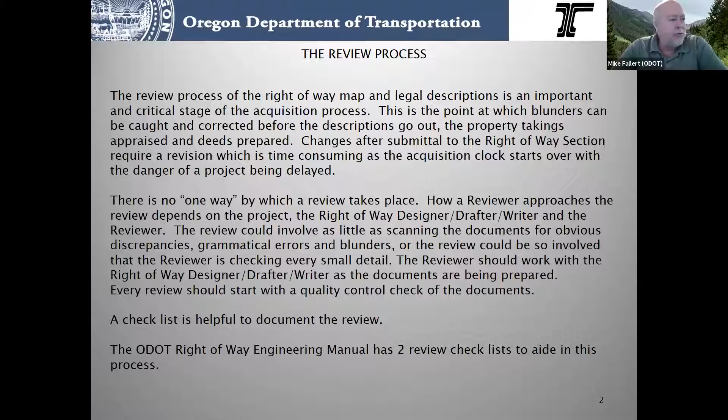Within ODOT, in our right-of-way manual, in the appendix, there's two checklists that we have provided that they've created and put together over the years - I think the original looks like 2012. There's a light review for maps. We've got some others that I think we've been working on for internal ODOT with some different stuff, but it basically has the same stuff from that the survey group is working on. I don't know if we're going to get them incorporated into the manual yet, or when that's coming. It may be soon.

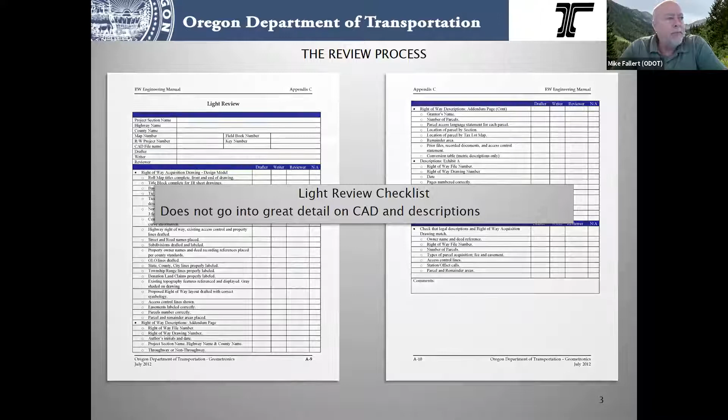So you can do the light review checklist. It goes through a lot of the things - you don't have to get super detailed, but it is best if you, maybe the first one or two, especially if you're new at writing descriptions or your group is new at it, this is a great roadmap of things to check.

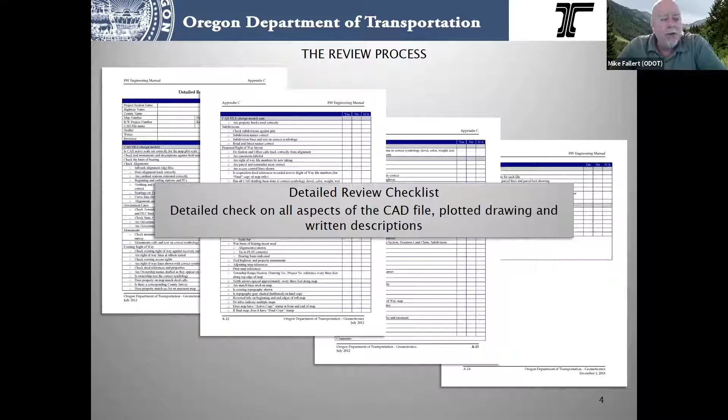You can get into the very detailed, which is going over the CAD and plotting and writing and everything all combined. So much more detailed, a lot more checklists, but it's tried and true - it's through years of doing this basically. So this information was passed down and combined over the years.

So like we've talked about, the primary purpose of the right-of-way drawing is to provide a visual guide, and it assists in the property acquisition on our projects. And it has drafting standards that have been set up and clearly defined for years to make the information as clear and concise as possible. It's imperative that you try to adhere to the standards because that keeps that consistency that we were talking about.

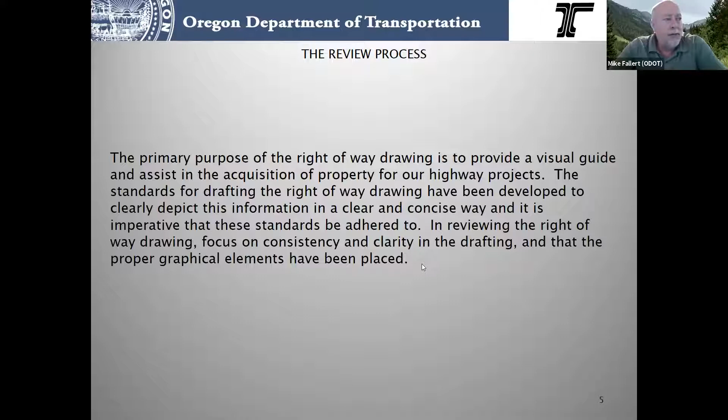So in reviewing the right-of-way drawings, focus on the consistency, the clarity of the drafting, and graphical elements that have been placed.

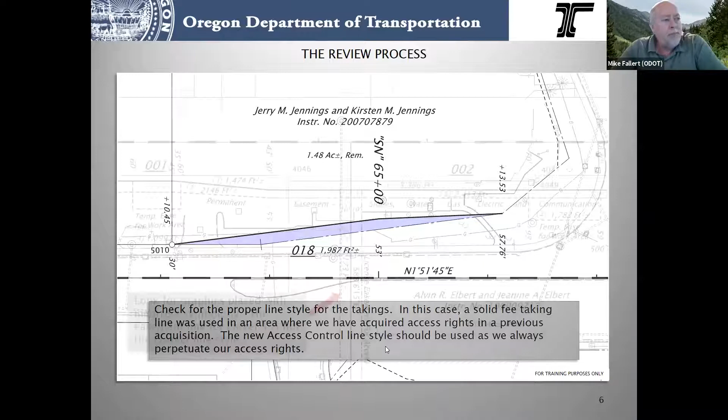In this scenario, look for graphics placed with incorrect symbology. The easement line here for parcel 3 is not the correct line style.

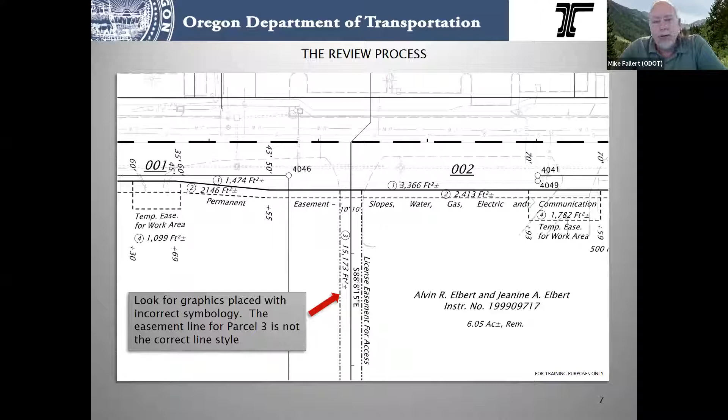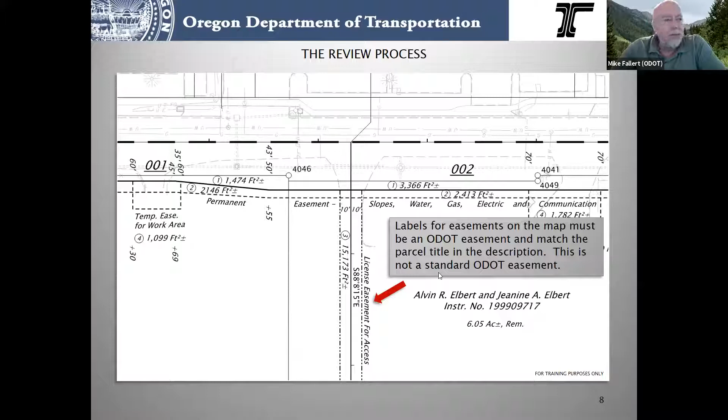Look for labels of the easements. They must be part of the ODOT approved easement list and match the parcel title and description. This title here is not an ODOT standard easement. If you were showing an existing easement, you would say 'existing' if that was the title, but not for a new easement.

Here, government section lines don't stop at the highway, they continue through. So these are just some minor scenarios and things to look at.

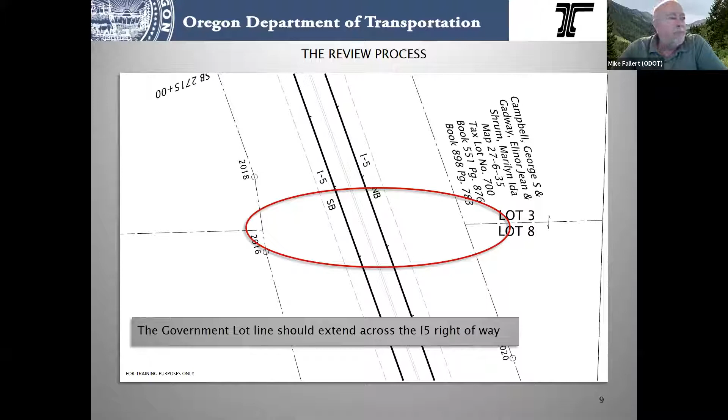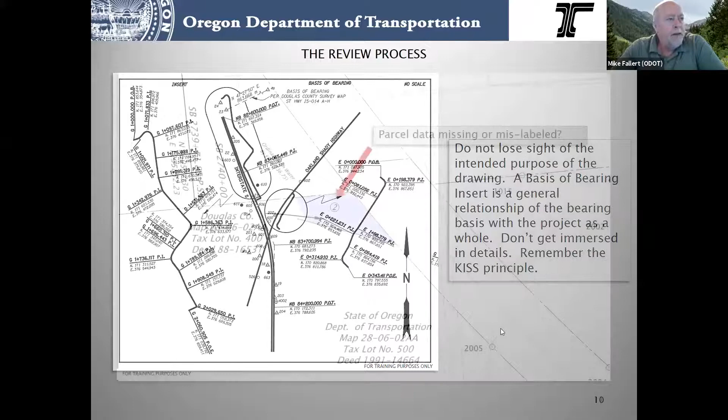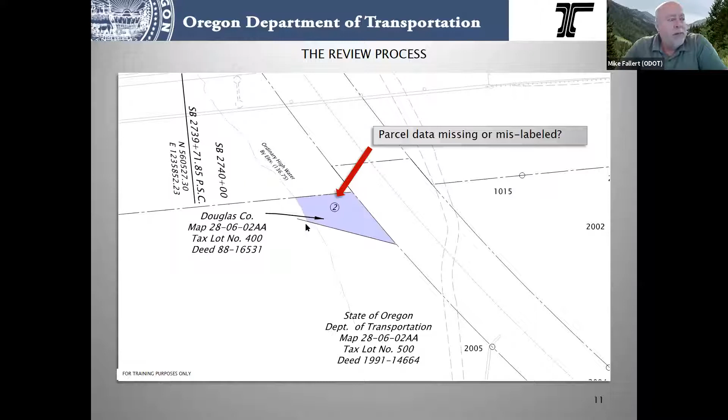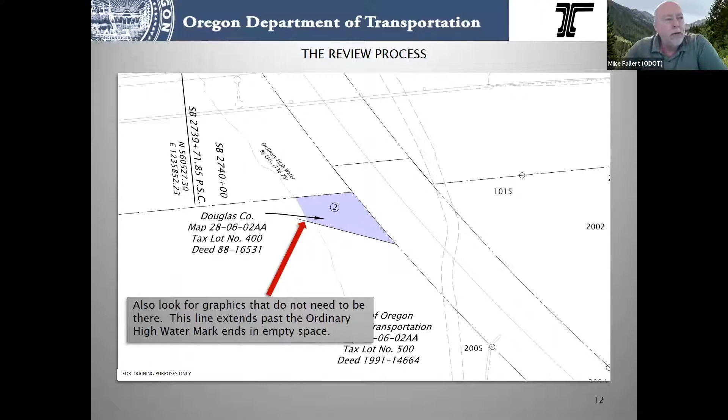Also in this review, you want to look for things like missing data or mislabeled data. Here there's a line sticking out, graphics that extend where they shouldn't be past the high water mark, empty space. There's a parcel 2, but there's no parcel information, no square footage or any of that.

Consistency again — you can see everything else, all the files are supposed to have an underline underneath. Parcel 9 doesn't, so there's an inconsistency. Inconsistent format — the feet doesn't have the square plus or minus; it's missing off the end of those.

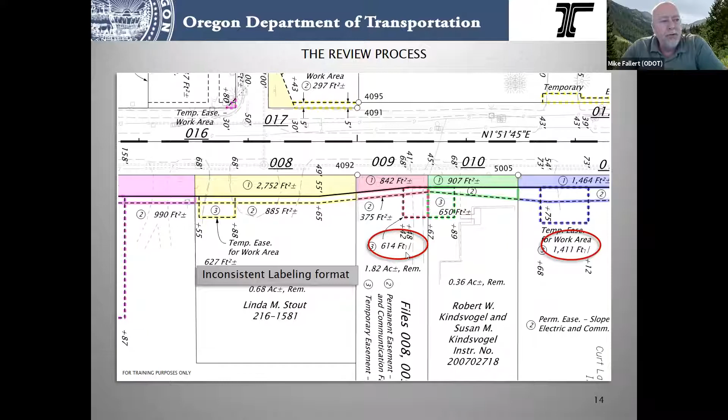Area shape for parcel 3 is on the level of a permanent easement rather than a temporary easement. See, it's solid instead of dashed like over here. Look for those — that just means it's on the wrong level, or the wrong shape level for the pen table.

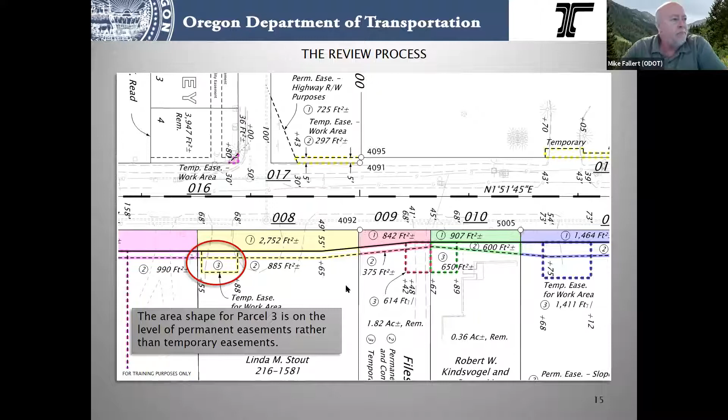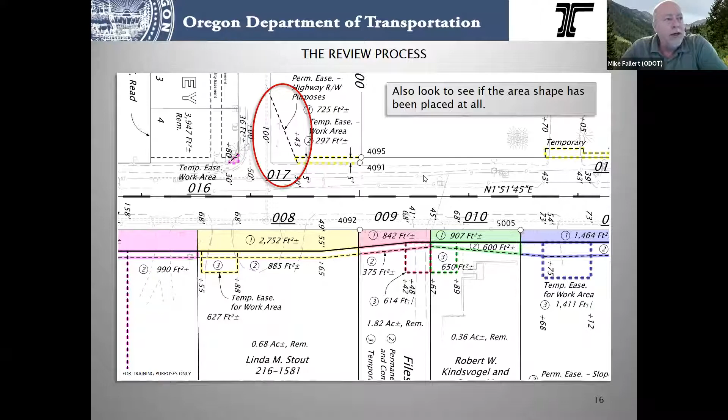Look for clutter and overlapping text. You can see a lot of things crammed in there, and the distances are stuck over the line, so it's going to be really hard to read. Try to make sure everything lines up and fits where it needs to.

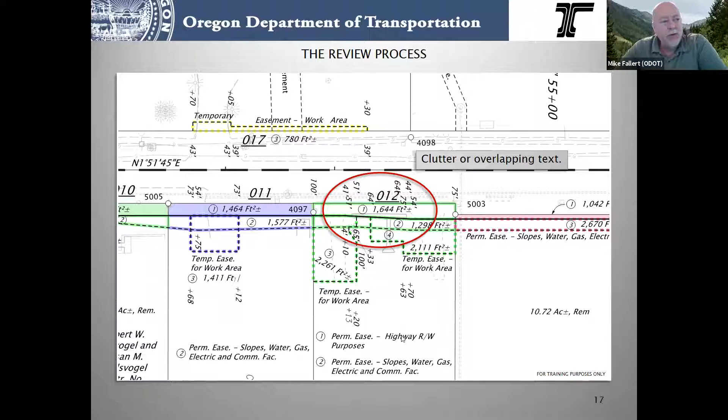A lot of times arrows can be used, like over here, to work with it and make it as clean as possible. Some of these have a lot of stuff going into them — this one, you can see they came down here and put what each of the parcels were and the titles down here because of the tightness of the area. You can do that too.

More clutter and overlapping — you can see here that the topo evidently wasn't labeled as 'exist,' so it came through at full force and not gray shaded, and you can see how it overtakes all the other elements of the right-of-way map.

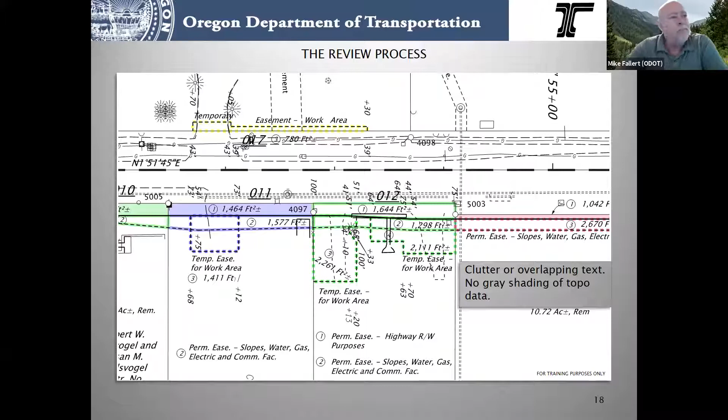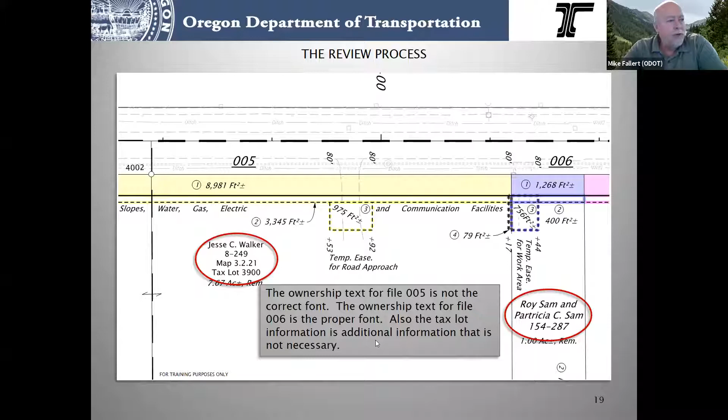Ownership text in file 5 over here is not the correct font. Ownership text for file 6 is the proper font. This one's slanted, this one's straight. The size even looks possibly a little out of whack. So look for those consistencies.

Now we talked about some overlapping easements — here's another example. We've got a permanent easement for slopes and utilities, and a temporary easement for road approach. The sidelines of that temporary road approach need to cross over parcel 2, over that slope and utility easement, because the slope and utility easement only covers slopes and utilities — it doesn't give us the right to cross that area to recreate or rebuild the driveway or road approach. So that's where it'd be so many square feet of parcel 3 lying within parcel 2, so that it's appraised correctly and we acquire the proper rights from the landowner.

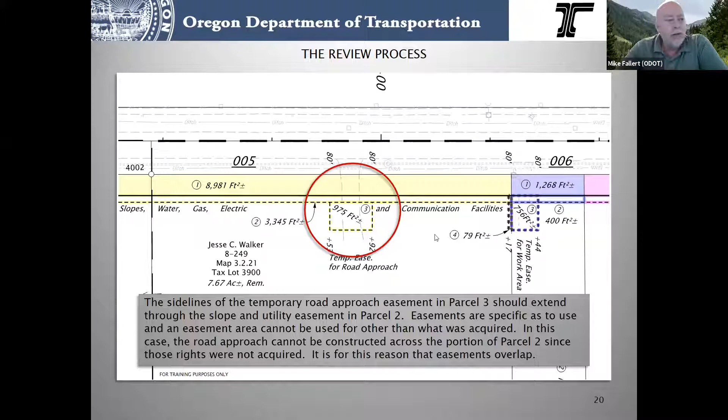We talked about the addendum — the information sheet, metadata for the acquisition, and all this goes into RITS. It's for the document specialists, for agents, for all those to know the overall status on one sheet, to make sure they have all the pertinent data for the file. Make sure you go through and double check all of that.

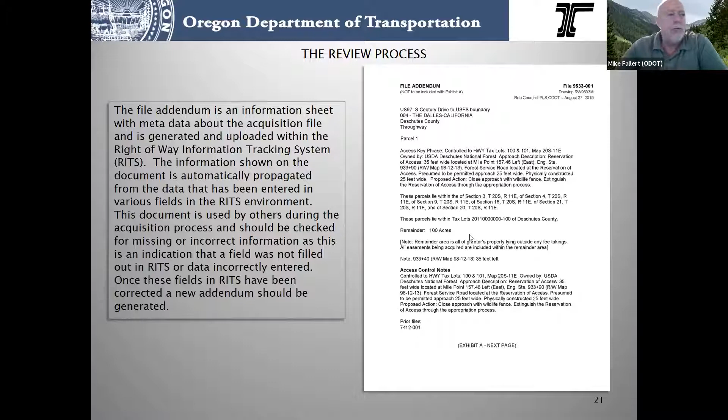Remember remainders we talked about — typically 100 acres or more is handled that way. Others, a lot of people in different regions will use per the assessor's map, or per the Polk County assessor's map or such, which I think I'm going to talk about in a minute. Got ahead of myself.

Throughways. Why we're still doing it, I'm not positive for putting that on there. But throughways were one of the first

attempts at defining or labeling working with access. And it went up until 48, I think, or 51, I can't remember. Anyways, there's throughway maps that are created, and they're dated. They're a snapshot in time and history.

What they were is if in an urban area there was more businesses and more than like 10 driveways within a mile, it was considered urban or non-throughway. If you get into open areas where there's less than 10 driveways per mile, it was considered throughway. They had it broke into sections, and there were only certain roads considered throughway. But what it had to do with was safety, access, and that sort of thing.

Now we're still putting that on there, and it's still part of our addendum and still part of our process. Try as best as possible to define the area based on that old map. One of the caveats is, if any portion of the project hits within the throughway, then it's a throughway. If it's all outside of the map of the throughway, then it's a non-throughway.

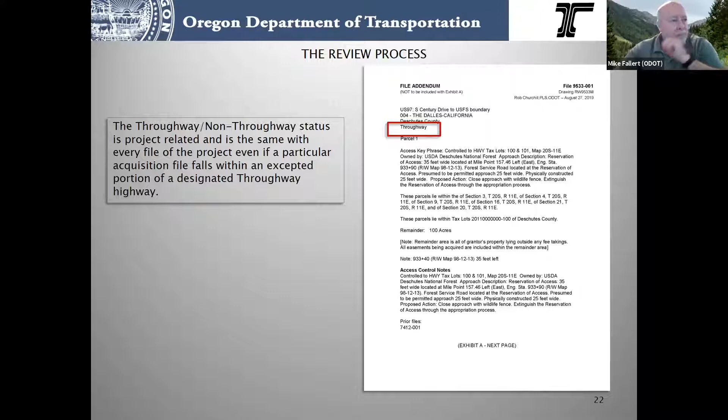Access key phrase. We pay special attention to this access key phrase, and there's 6 or 8 of them. What that keys up is the boilerplate for the document specialist to bring up that has the correct wording as far as controlled or restricted or uncontrolled or frontage roads or no access, all the different ones.

We've had some issues over the recent years with this access key phrase and what's been put into there. And so that's why the right-of-way engineering surveyors aren't just playing telephone or sticking something in there. We're actually working with the right-of-way agents and the access control engineers, having them put that information and give it to us, or put it into their side of the RITS, so that there's no miscommunication, because it does cause issues.

So whatever you do, if you don't know, don't put anything. If anything, leave it blank.

As far as turning in something for a draft and you don't know yet, you hopefully should know by the time you're writing the description or putting in the addendum. If not, please contact your right-of-way agent, your project leader, whoever you're working for, and say, hey, I need to know what access rights or key phrases are going on here so that I can get it correct on the map, write an access parcel if needed, or get it on this addendum review for when it goes in. So don't just throw anything on there. Make sure you're sure of what it is and get it directly from them, please.

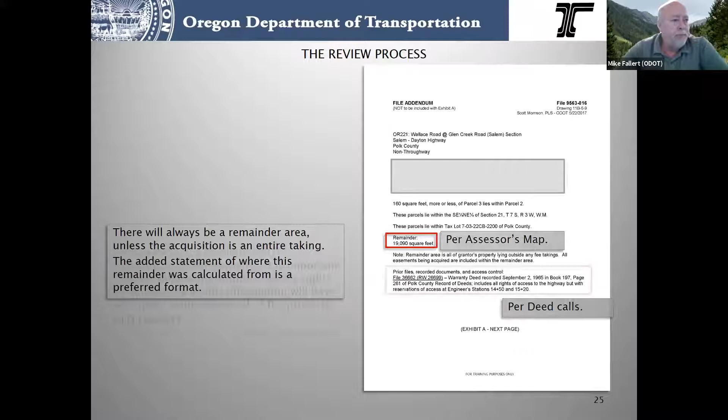The reason for prior files, like I talked about, is our projects are stacked on top of each other, and say we've had two or three different acquisitions over the years, and in one of them we acquired some access rights, or we gave a reservation, or there was some other specific thing in there that is a right we acquired or left with the property, then we need to know what that is.

We used to spell it out just like this. We would type and add all of this in here for the agents or for the doc specialist to know, and a lot of the title reviewers too. You can type all that in, or you can just list the information, and then in the new format we're calling that access impact notes.

The right-of-way agents are putting this on their side, along with communication with the access engineers. They're saying, what are the access impact notes? And they'll say, prior file, or this property has access controlled with a reservation at this point, and no change is going to be made.

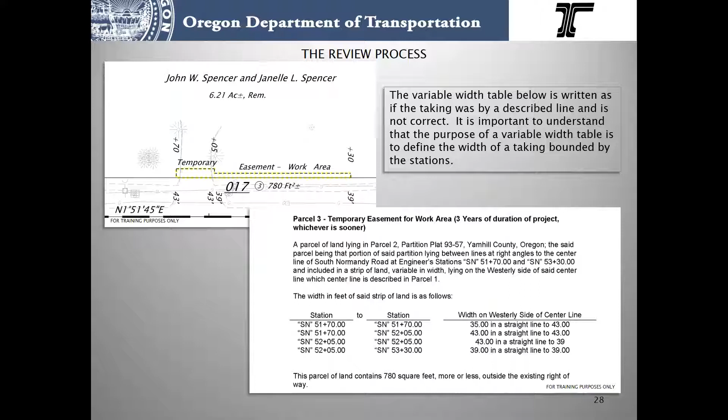And the other thing is, about all our descriptions, whenever we mention anything about area or acreage, we always say plus or minus, because a lot of the times our maps are just caricatures. We don't survey the properties - we survey our property.

And that's kind of like the discussion of precision versus accuracy. We're not surveying all of these properties and their sidelines and everything else. We're laying them out per deeds, we're using record of surveys, we're doing our best attempt without actually surveying every single property, because ORS gives us the right to do that. If we're taking off strips, we're not doing a replat or a partition plat or any of those things.

So we have a plus or minus. Sometimes right-of-way people or appraisers don't like that, and they'll still argue that. From a surveyor standpoint, I'd argue - when I go out and survey something and there's a monument someone set 20 years ago, and I shoot it and say, well, it should actually be a 10th this way or that way, so I put a new rod in because I'm better than them - no, that's not the way things work. It's a plus or minus, it's situational. So you fit it within reason, and that's kind of how we work that.

We try to give the benefit of the doubt to the property owner in all circumstances, and we stay close but not exact in that sense, because we didn't do it that way. So anyways, hopefully that answered the question. I think so, and I think that's all of them for now.

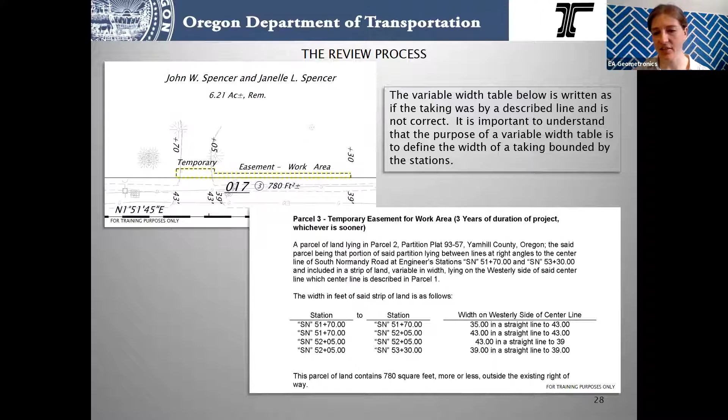Okay, so variable width table. They're written to describe a variable width. Now the one below was more like a described line, and it's not correct. It's important to understand the purpose of a variable width table, as it defines the width of a taking by bounded stations. So they're saying it's between stations, and then they do the straight line on the sidelines and all that sort of thing.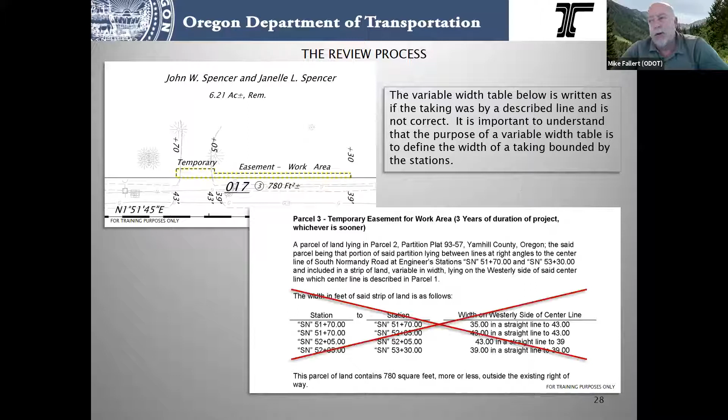So when we're doing a center line description, bounding that way or adding too many things to it doesn't work. That's not the way to do it. So the proper way to do it...

...is within the variable width table. It's a strip of land, and when it says 43, you don't have to call at the right of way line, because we're going from here straight out, just like a 90-degree angle, at that station, and we're doing 43 feet from here to here, total strip from center line out. So we're not describing the whole line, we're describing the strip, okay?

And then from that point, same point, same stationing, now we go to 39 feet, and we do 39 feet all the way to the end. So it's a strip from the center line clear out. It's not describing this line, it's describing this whole strip and the jogs in that strip.

So those are things to look for in the review process also. Now we do described lines, and we do described tracts. One common mistake that can happen in a strip description: you can't go backwards on line. It has to, everything moves forward. If you have a jog or something that has to go backwards, then you need to do a described line or a described tract.

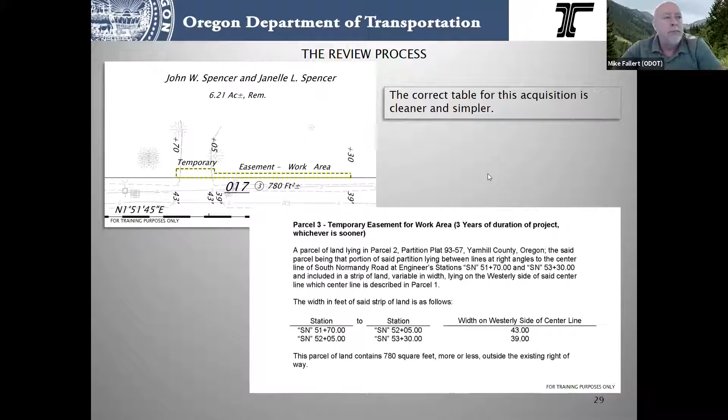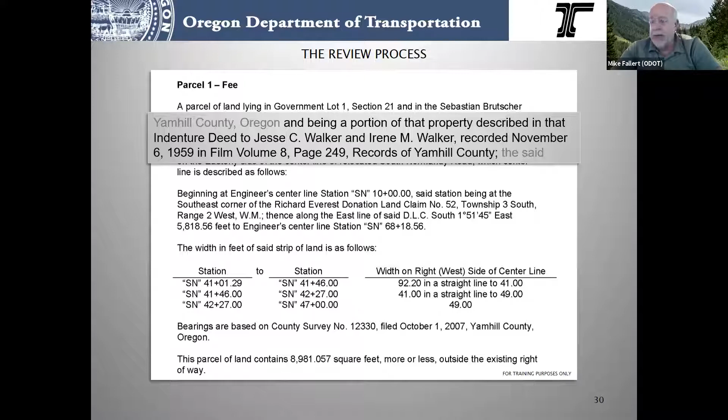So in the manual, you'll see lots of examples. It's very specific, and if you look back to a lot of documents that can be up to 100 years old of ours, it's basically done the same way.

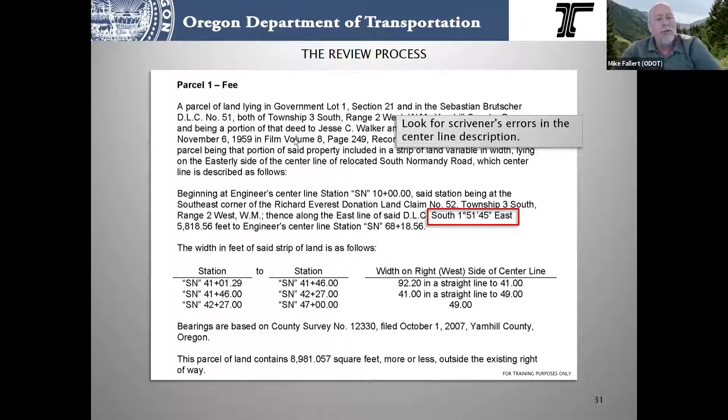Look for scrivener's errors in the center line and others. So here we got southeast, but if you look at the map, this way you have to have it all together. You see that it's actually northeast and not southeast. So that's why you want to get this center line right.

If you're writing a whole bunch of descriptions, this same center line description could go in 20, 50, who knows how many descriptions, and you're just going to copy and copy. And so if you have an error in it, actually I found one in a project when I was doing, as I was writing a relinquishment. The project had closed, writing the relinquishment. I followed or just copied the centerline description, and actually Right of Way caught it.

And it was this exact same thing. It went northeast instead of northwest. And I think there's 3 descriptions that were written, recorded, acquired, and everything else. And now we have to go and get official copies and revise them. Fortunately, my relinquishment was just still in review or hadn't been totally finalized. But it can happen, and what it was is the surveyor just copied that centerline description in 2 different ones...

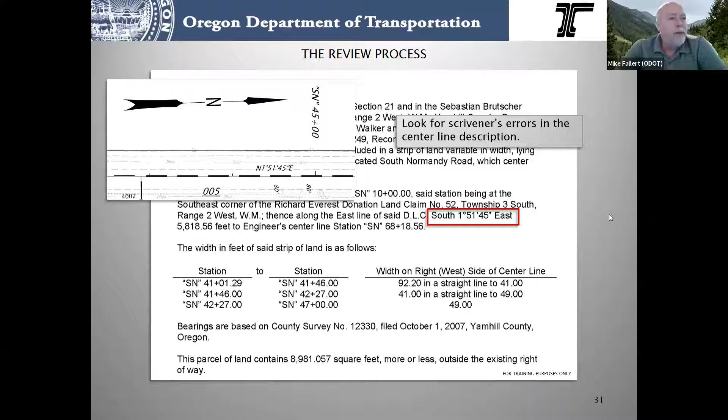...or 3 different ones. And so it did - it got acquired and purchased, and it was headed the wrong way. So it can happen. So please review your stuff, have it peer reviewed.

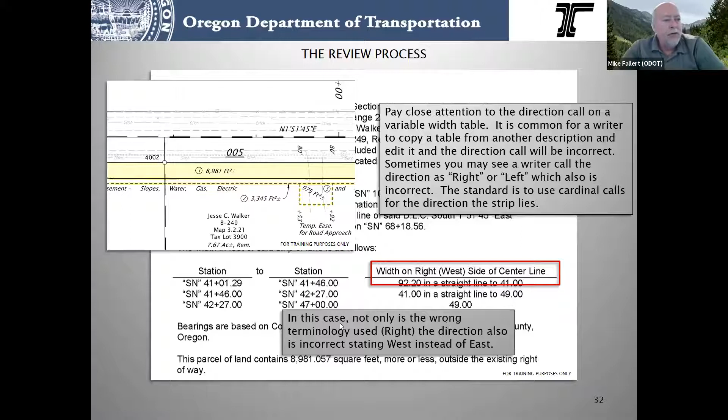We do not use right or left anymore. I used to, but now we use cardinal directions. So in the table, we want to specify what side of the center line when we're doing it. They copied a table probably from another description, did some edits, forgot to change something. So we don't use right or left, we use the cardinal calls, that sort of thing. So not only in this case is it the wrong terminology using right, but the direction is also incorrect, stating west instead of east.

Square footage - no decimals, bad decimals. Round to the nearest foot, and round up if at all possible. So this one would probably be rounded down just because it's really pretty low, so it would stay at 981. If it was 4, pushing 5, maybe you might could round up to 82, but no decimals. Even if it's a tiny little sucker, no decimals.

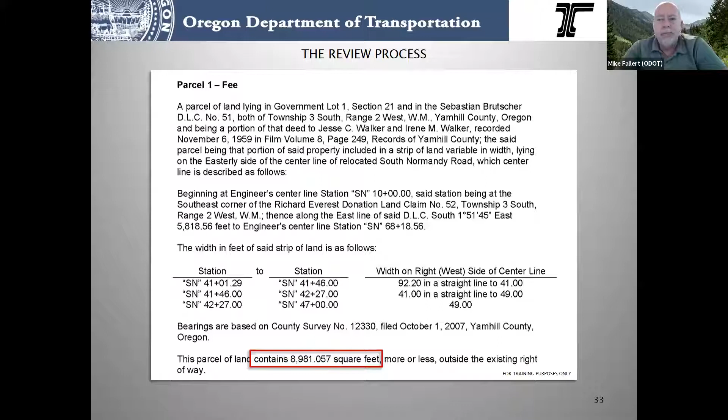Because appraisers only go to square footage. They don't break it down that far. So the accuracy is just - we haven't surveyed it to the thousandth of a square foot. I mean, that's just, gotta, we're not building a watch, so yeah, don't do it.

So parcel 3, temporary work area - that's the wrong title for the easement. It's a temporary easement for a road approach, not a work area.

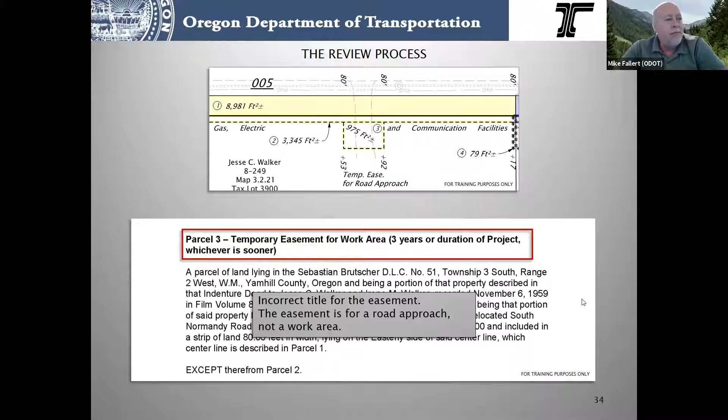So look at those. They excepted therefrom parcel 2. Parcel 3 should extend over the top of the other, so many square feet, 234 for this, should be inside of parcel 2.

So this one, let me go back here - overlay. So this one you can see is kind of on a corner. There's a center line tying in this way, center line going this way. They've got it broken into 2 separate parcels, one that's on the sideline, one that's on the main line, okay? Just so you got a good visual there.

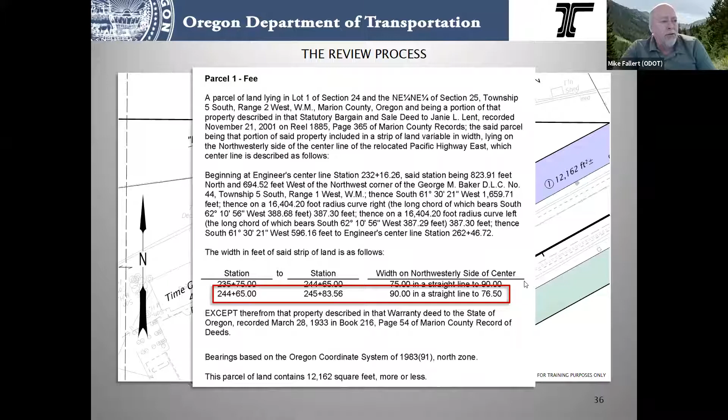So there was the description, and it had a stationing to a stationing, 90.00 in a straight line to 76.50. Watch this stationing here. So here's that stationing, plus 83.56 at 76.50. You see anything wrong with this little knob sticking out there?

So when you do a 90 degree to the center line, they didn't double check that this went past the end of that. So in this description, we didn't acquire that triangle, okay? So those are things to keep an eye on with strip descriptions. What they should have done, the simple solution would have been to carry that last call clear out to this station over here, then we know that it crossed that property.

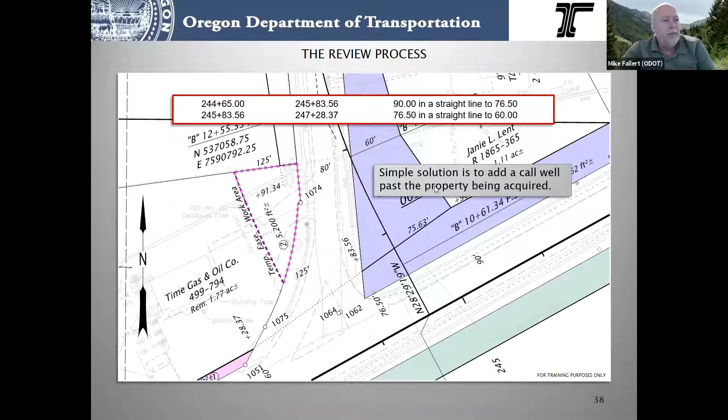Remember, this sideline, though we didn't survey it, though we didn't define it that way, it is defined by the deed that we are acquiring the property from, okay? It can't go past it. In other words, we couldn't be acquiring from this person if it was a person - it's a road - because of those 2 deed lines. So yeah, make a call past the property.

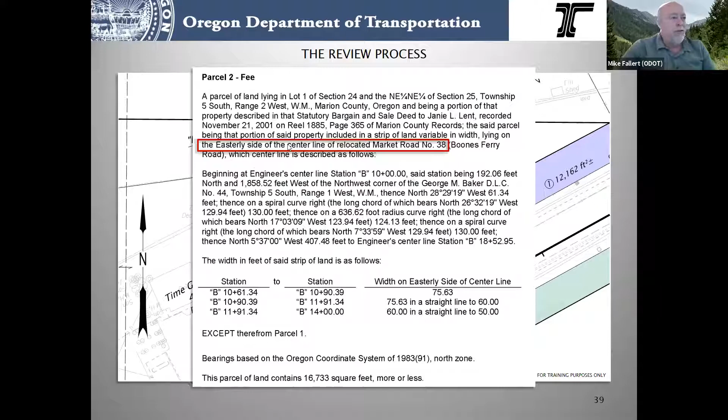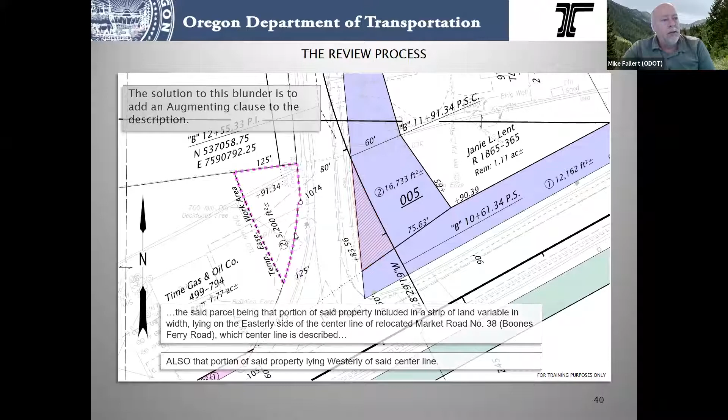So up at the top here, it says that it's lying on the easterly side of the center line of the relocated Market Road, okay. Which side is the easterly side? Over here. We didn't mention, or the description writer didn't mention, any property that lied on the westerly side of that. So in this description now, we didn't acquire any of that property that we intended to.

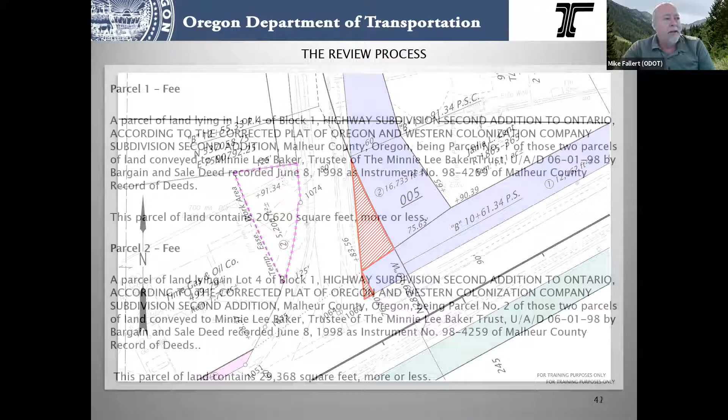So make sure and check those sort of things so that we make sure that we acquire on both sides. This center line issue happened quite a bit, so really watch for that one.

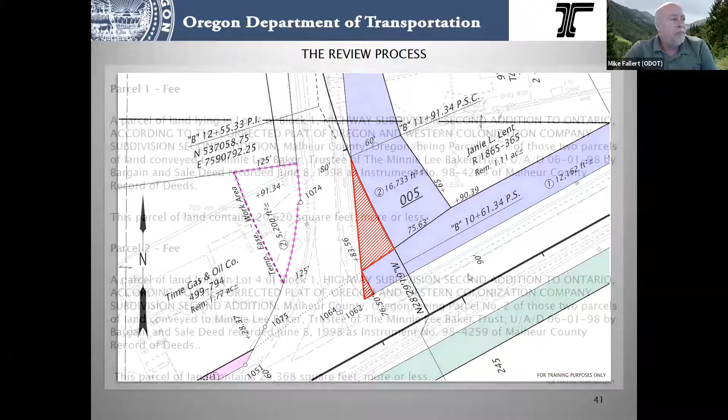So here's the 2 tax lot scenario. They're contiguous with each other and are described in the same deed to the grantor. They could be combined as 1 fee parcel. However, circumstances such as continuity of use - like if one tax lot is residential or agriculture and the other is commercial - then the agent may want you to split them into 2 different parcels, or they may want you to split them into 2 different files. It depends on what they feel is the best way to appraise and take care of the property owner.

So these 2 tax lots are also contiguous. They have the same owner. They could be combined into one and the same deed. However, their use again - fee and fee - what is their use, okay?

So another one - make sure, in the manual, you always want to make sure a reference to a subdivision is the exact name that is on the plat of that subdivision. It's always put in capitals, so that it's official, the way that it was platted, so that it can be matched up exactly, so you know exactly what we're acquiring from or where. Don't use abbreviations, especially in subdivision names, unless the abbreviation is part of the name.

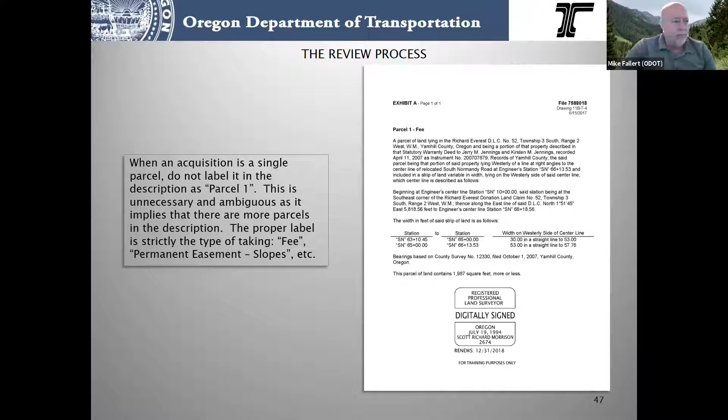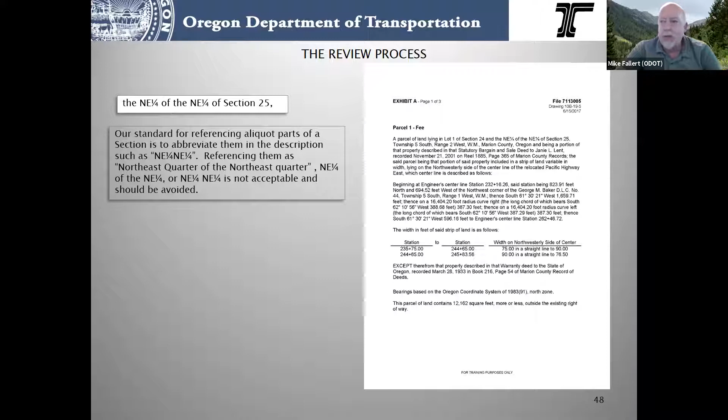This is all inside of the right-of-way manual, which Paul in his next session is going to come up with, and he'll be working on actually writing descriptions and showing that kind of stuff in the manual and where to find it, what it looks like.

So in the review process here, these are just common things to look for. So we have an except since we had a prior acquisition, right-of-way phrase outside the existing right-of-way is not necessary. Because the road itself is held under other title, there's no portion of the grantor's property within the right-of-way.

That comes in the old stuff where it was a resoluted road or whatever is there by easement, and this old deed of these grantors, usually you'll find it more out in the rural areas now, where their legal description went, say, to the section line, which is the center of the road. And they've never changed that deed, nothing for years. So then when we come through and do an acquisition, we state how much is outside of the existing road, and then how much is inside it, because it will be appraised at different values.

And the reason why is because the grantor hasn't had the use of that other than as a road. They gave that to it. So that's the outside of the existing road. But if we have acquired it in fee and we have color of title, then it's our property. You don't have to say it's outside, it is. And that's down here in this except, where they put in this other part.

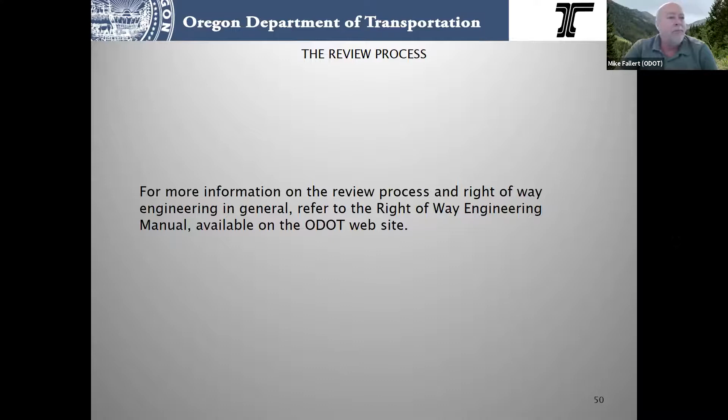Because I'm cruising along here. It's been a little while since I put these on, and of course in this format, a lot of times when you're in a classroom format, you get a few more questions and a few more delays. It kind of staggers you along. So, and probably I'm getting hoarse, so I'm glad that Paul's going to start talking now and give my voice a break before I crack.

How about we're coming up. Should we do an early break then?